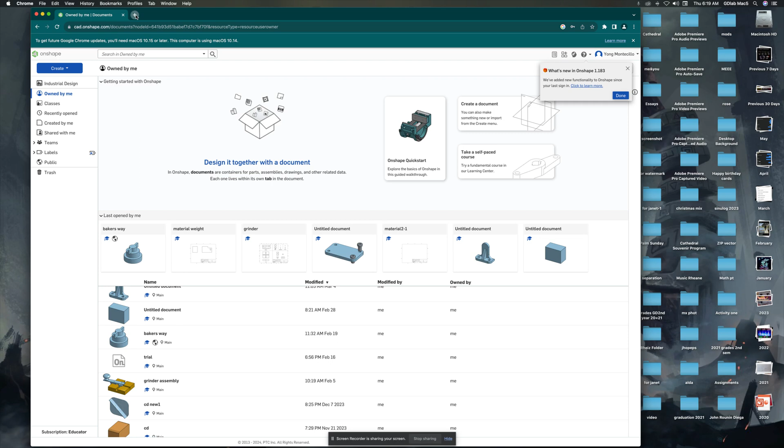Okay, create document, exercise 2, and then I'll go to my problem.

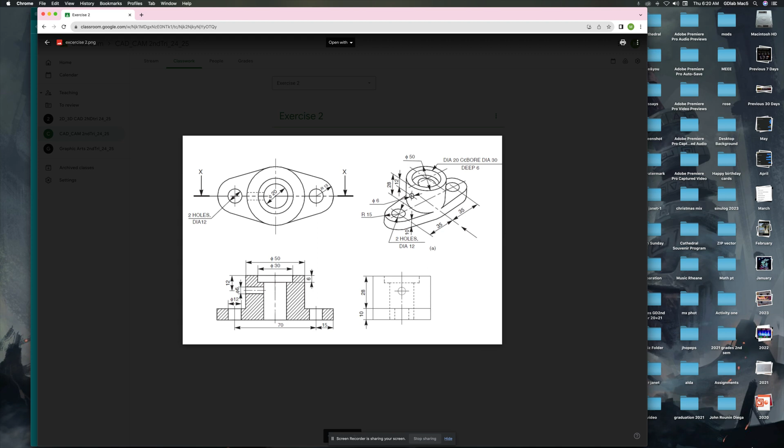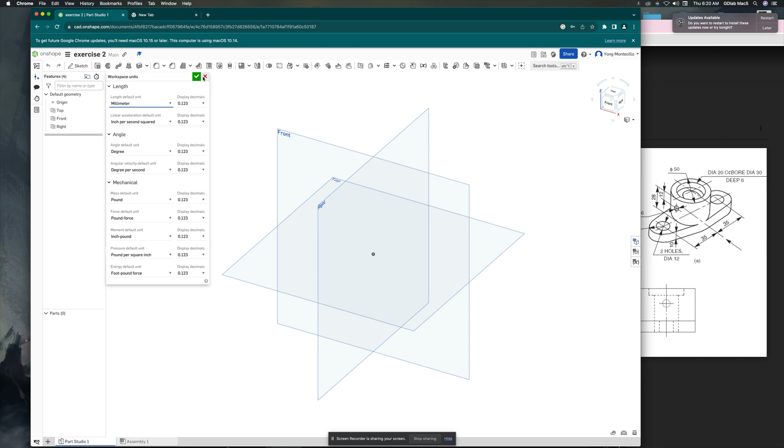So all units is in millimeter. So I'll check my units under workspace units. I use millimeter, then accept.

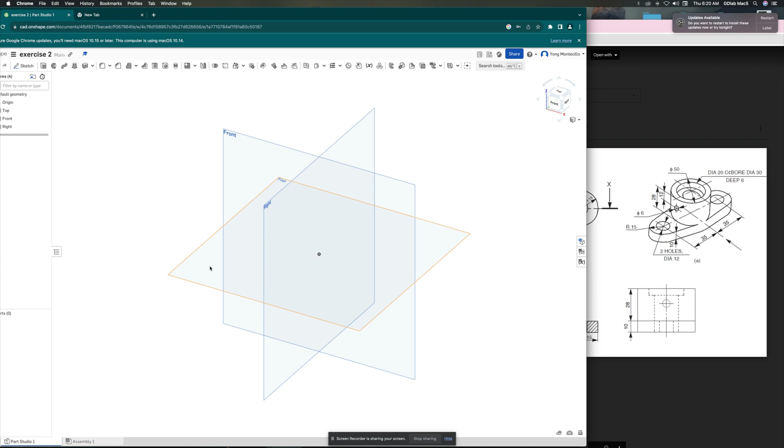Where should I start? So I decide what plane should I start. I choose the top plane, this one. So normal to, and then I'll draw my shape.

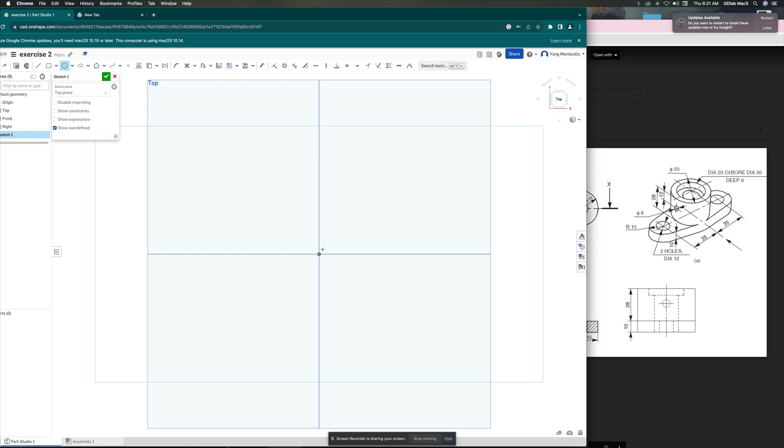I just draw the first one, this one. So circle, so 3 circles. Sketch, circle, 1, 2, 3. Okay, and this has 2 circles, and then 2 circle, and then I put relationships.

So this one and this one, I just press Control or Shift. These should be equal, so I put equal. This one too, equal.

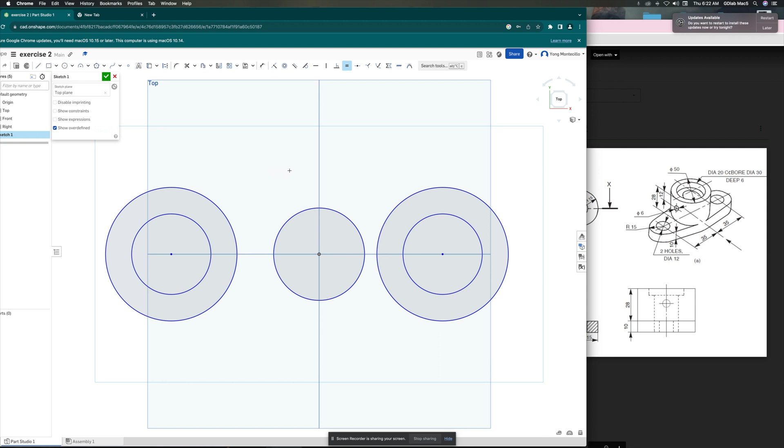Now they're equal in size. And then I'll dimension, I'll put dimension on that earlier dimension. Where's dimension? Here. So this one should be 50.

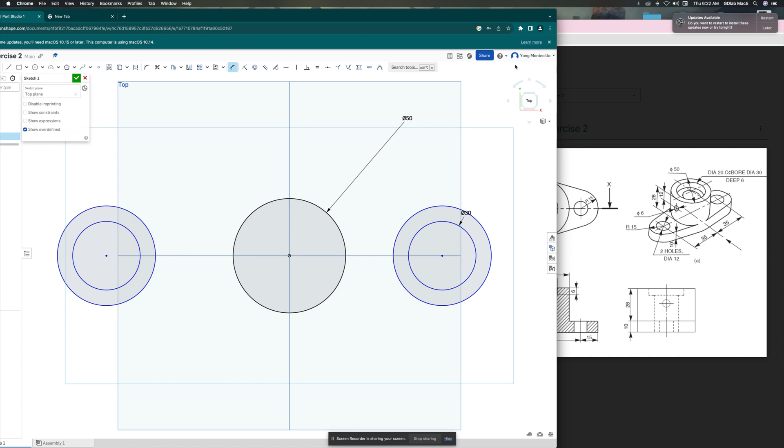Diameter of 12, so just double click. 12, diameter of 12. Okay, then this one is diameter of 30, this one.

Then this one, from here up to here, this is a distance of - what is it at the bottom, how much? From center to center, 75. I can just do 75 divided by 2, enter. So that is 37.5. Type it in there.

Okay, so the same thing from here up to here, that's 37.5. So I used the calculator function. Make sure it's already defined.

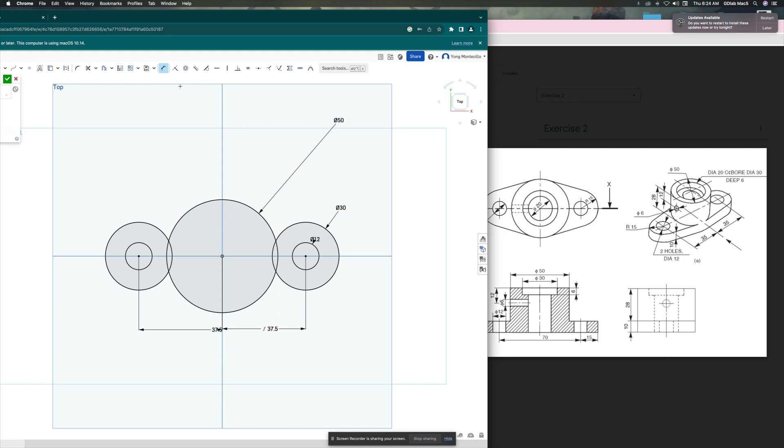And then I add my line. So sketch, where's my line? Here. So I'll just draw along the side. You'll see what's along the side.

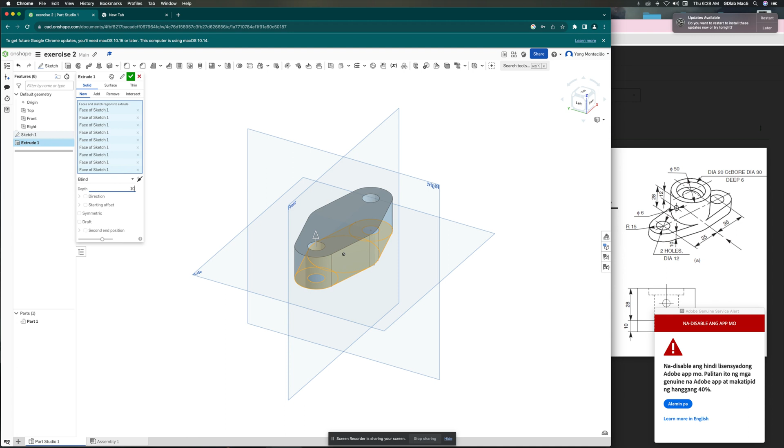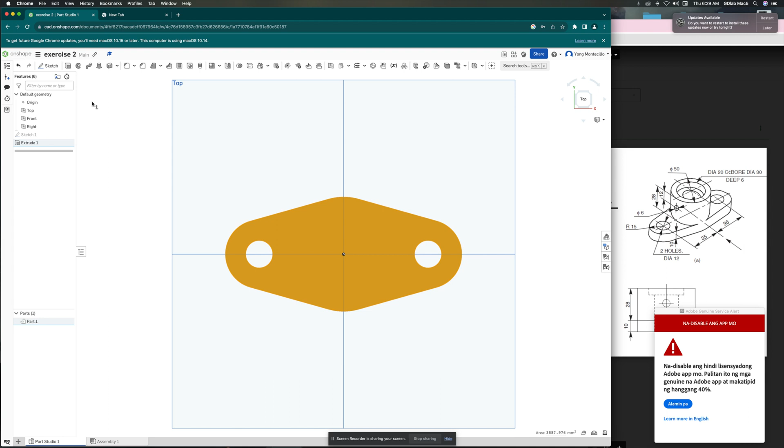Okay, so this is my first drawing. I'll leave this alone for now, I'll make the hole later. Just this one for now, I'll stack the next part on it later. Okay, so the second part is the top. I'll extrude it too. So on the top, again, I'll try to draw another one. So sketch again.

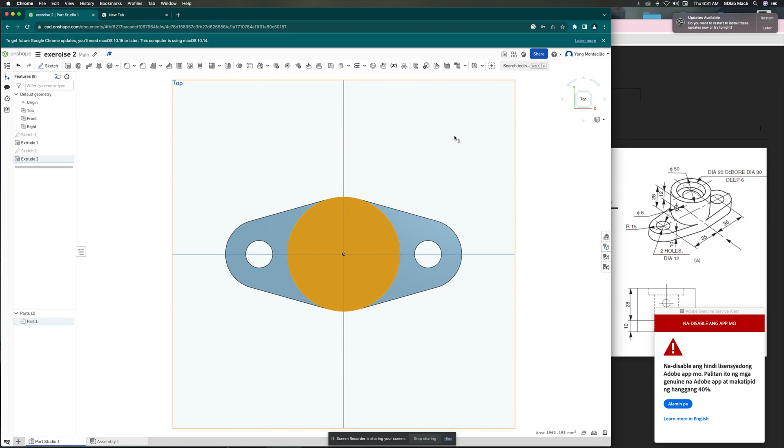Draw my circle, sketch. How much is the dimension of this circle? This one? So the dimension is the inside 20, so dimension of 20. This one. 20. Accept.

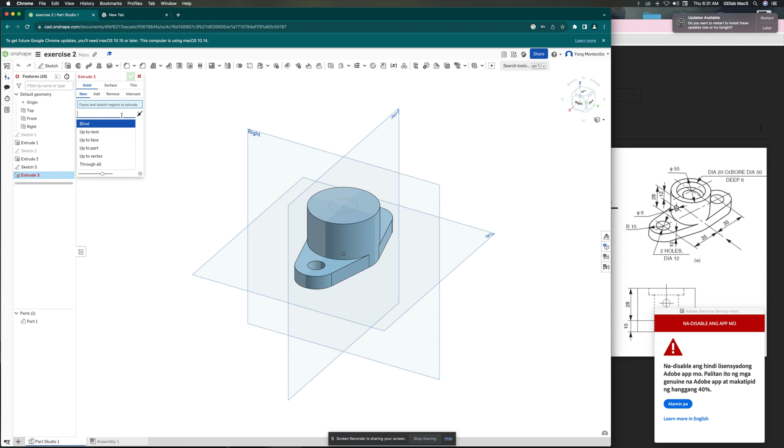So through all here, dimension, accept. So if you look at it again, on top, here through the material. And then I'll need to put another sketch here on this plane, so I click on the plane, and then draw another circle.

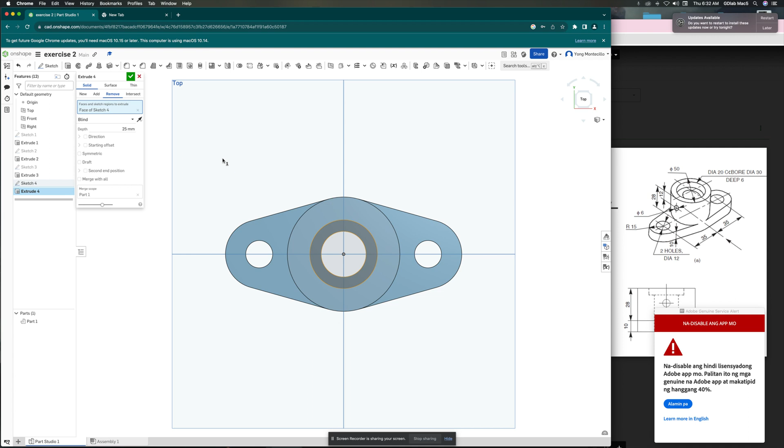And then dimension. So what's the dimension for this one? That's 30 for the diameter, and the depth is 6. Okay, this one is 30. Enter, and then accept. Extrude, this one, remove, under remove, blind. Let's see - angular, blind, the depth is 6. Accept.

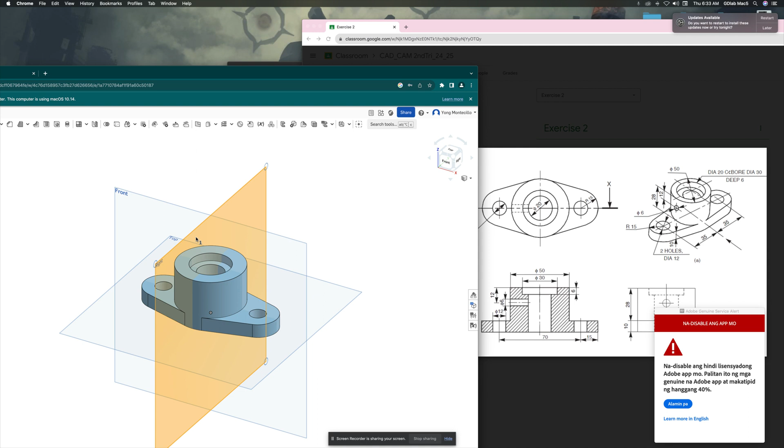My only remaining problem is the hole on the side. Okay? So I choose the right plane, that one.

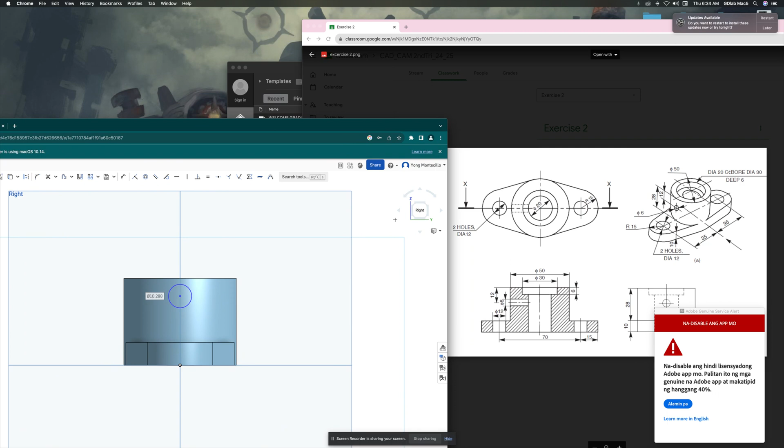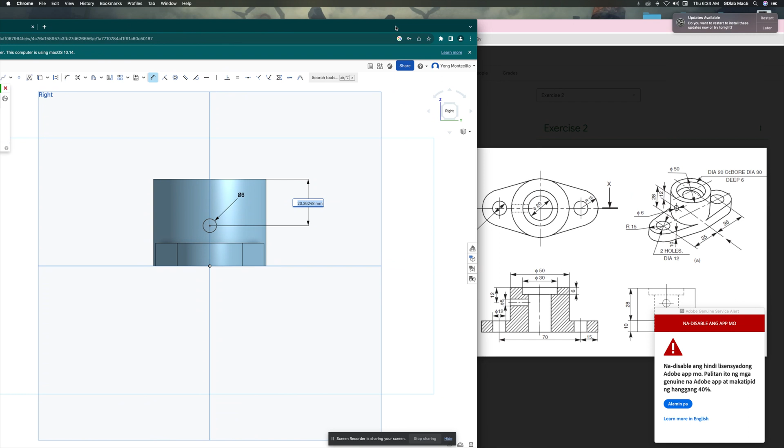And then right plane, and then I'll draw my sketch, and then draw my circle, this one, okay, and then dimension that circle - how much diameter? Diameter of 6, dimension, go 6.

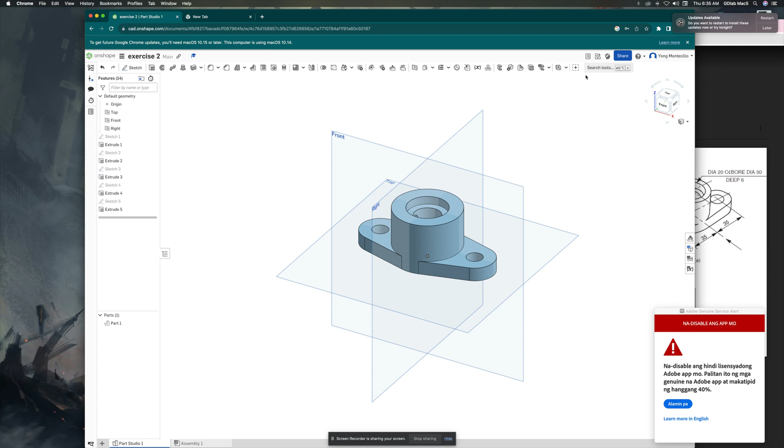It's custom view - where's the view? This one, is this the viewing angle? Yeah. Okay, so this is my isometric and 3D view. So you'll put this on your paper for your detailed drawing of this one. Okay?